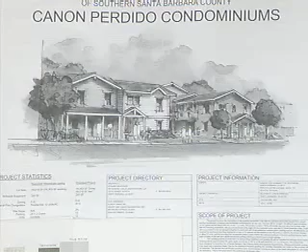Very good, Madam Chair and fellow board members. We're here, I think this is our 5th time on this project, Habitat for Humanity on 822 East Canon Perdido. It's 12 new low-income homes, and we're excited about the pace we've been moving, and the team's been working really hard.

Initially this project was to show that we can do green for low income. So we've got a lot of engineering that's happened and some value engineering over the last couple of months, and the project's targeting about 60% better than Title 24 currently. We're excited as we'll be wrapping that up in the next couple of weeks and getting into the building department. We want to thank the board for all the input along the way to help refine the project, and you'll see some of that based on the comments from last week.

So with that, we've got in front of you a mostly complete set. I left out some of the engineering that wasn't relevant to some of the ABR concerns. We've got a detail book, 11 by 17, with the cover, and then some individual building by building materials boards. And our color board, we have just one color board for all of the different buildings here, and they're tagged in the sets. So those are the pieces that you have in front of you.

Since we were last here, just want to generally go over some of the things before I get into the list, and we can look at some of those items that changed in more detail. We've got the full detail book now for your review, picking up a lot of the comments and coordinating those elements. The major thing we've done is we've redesigned Unit 12, which is on the Canon Perdido front.

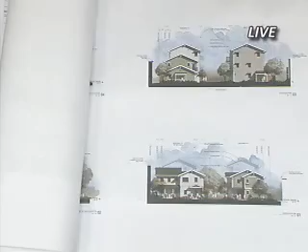We've also taken a look at some of the banding on sheet 202, which is one of the other comments. Some of the banding related primarily to Unit 2 here on this form. We've eliminated the banding on this, Unit 5 here, and Units 3 and 4 with their green color.

It kind of grounds it as it's more horizontal. By removing it, with a stronger vertical, it helped ground the building. I see a little typo here on the previous sheet where the ghost of our banding remained, but it is indeed intended to go away.

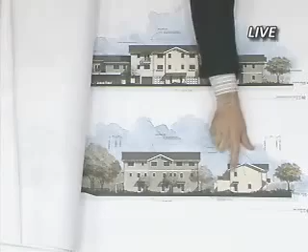Other things we looked at were alignment at the corners of the gutters and downspouts with some of the trim elements as well as the corbels. So throughout, we've beefed up some of the corbel elements and aligned them with some of the trims on the corners, where there's trim and sometimes without, as in Unit 2 here. We can take a look at that more closely, starting from Unit 202.

Here on Unit 12, with a bit of a redesign of the facade, which I'll come back to, we've got some stronger corner trims aligned with the corbels. We've removed the trims on Unit 2, so they are more independent.

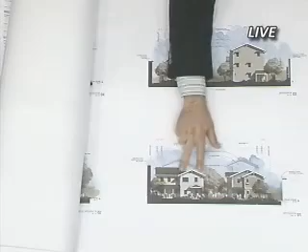Also on elevation 2, you can see on our third story unit here, Unit 3, that corner, which we felt was really important to keep as stucco, because when we looked at it in perspective, turning the corner without that was getting too monolithic. So we wanted those vertical breakups, and it carries through to the rear yards and also to the driveway, helping break up this 3-story building much better.

So you'll see that general realignment with the trims and the corbels throughout.

Additionally, the entry covers, primarily in the driveway on A202 and A203. Here on the white elevation, this is Unit 8, we took a closer look at the detailing of this canopy. We added some corbels to it, moved it up slightly, and increased the size of some of the members. You'll see the changes more pronounced on Units 3 and 4 of Building B on A203.

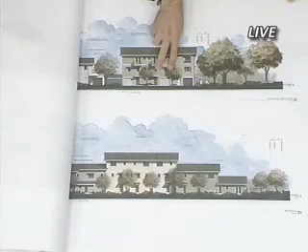Some of the other detailing which got refined is the window shading as well. We looked at the alignment of those with the heads, upsized the corbels slightly, and extended them out horizontally so they gave us a little bit of coverage. This is something we can see in the blown up elevations in the 400 series and also in the details.

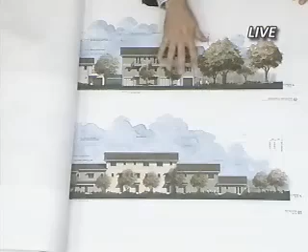The other item we were asked to take a closer look at was the windows themselves. We've gone ahead and added the sill piece back in and the sill apron, and left that trim detail consistent at all elevations, all window openings, whether siding or stucco. That remained consistent throughout. We didn't see the need to do something more different at those locations. At the other material locations, we thought this was working pretty well here.

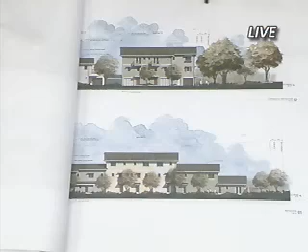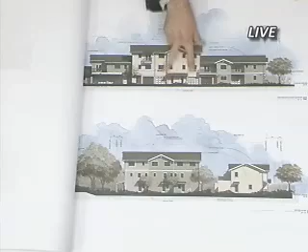Next item was that where two materials were used on the same building, a change of color should occur. We really just ended up at one location where this remained, which is on sheet A202, Unit 11. So this is we have a darker gray stucco over a lighter gray with the siding up above. At all other unit locations, the material is consistent from the ground floor all the way up to the roof. So this comment now just applies to Unit 11.

Number 4, there was no support for plaster horizontal bands. All the banding, as you'll see in the detail, is wood or a fiber cement type resembling wood, so that's what we have in the detail books.

Study the layout of detectable pavers and alignments with adjacent conditions. We'll come back to this with the hardscape and landscape review.

Number 6, study of wood trim around the windows is encouraged. Consider the details for consistency. I've covered that, and you can see that in the detail book as well.

Number 8 we've covered. Number 9 gets into options for introducing landscaping at rear fencing and preliminary landscape plans. So before I get to that, well, I think I've covered it generally, so I'll leave it for the board's questions on some of the details and larger views in the 400 series if you want to look at that more closely. So with that, I'll leave it to Courtney to take us through some of the landscape.

But let me touch on, again, the materials for the detectable warning, going back to comment number 5.

And so we've taken another look at this, and it's something that we're not entirely thrilled about either, with the requirement of the detectable warnings for the accessible path of travel. Here on L1, we're taking a look at it. We took another look at the code language, and the code is really constrained. It says the detectable warnings alongside the vehicular way must be 3 feet, or 36 inches. The building department has required us to turn those in just before the garages and after the garages, or groups of garages.

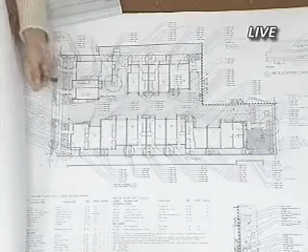Through the alley we have mostly succulents, the yellow Brugmansia and Agonis flexuosa - the dark purple one, I forget the name. So what we're going for is just a lot of color, low maintenance, low water, but something that's really going to pop and go well with the architecture.

So the other main comment since the last meeting was regarding this corner here and the slope. What we did is include a Brugmansia here to kind of catch your eye with the yellow flower color. We also have some Phormium, the dark bronzy burgundy one, and vines along this fence - the vines are Hardenbergia, which is like a light purple color.

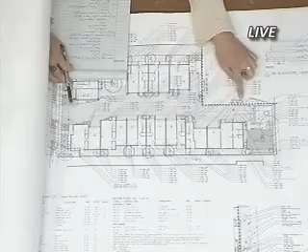And then we have a blow up of this whole slope area here on the bottom corner of the plan. So what's happening is we're going to be filling up to the dash line, and anything below that is being removed that's existing.

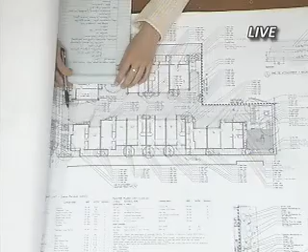We're still proposing a 42-inch high wrought iron fence along this whole corner. On the lower part, we have Lonicera vines with the yellow flower. So we're grouping some more showy stuff on the corner so you're not looking at an ugly slope, and just maintenance-friendly plant material everywhere else.

I think that's pretty much it. We haven't made any other changes to the plans. The pavers and the layout have stayed the same. We now have irrigation included in the set.

And I have a couple of the pavers that we have on the plans for you. So for now, this is what we were thinking, just a typical Ackerstone antique cobble, which we use very often on our projects. The color mix is kind of a brown, dark brown, and tan color.

All right, that's it. Is that it? Yeah.

Do we have anybody in the audience that would like to speak on this project? No? All right, questions from the board? Chris, do you have any questions? Gary?

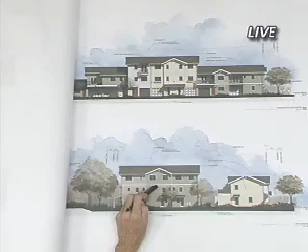This even—though it wasn't supported in the last meeting. Well, the banding, it's not a plaster band. That was what we understood wasn't supported, it was plaster trim pieces. But it's also just a flat band, it's not like wood.

It's a wood flat horizontal 2x8 piece of wood, is that correct? As opposed to the other ones, which have details to them, right?

There's a couple of different bands. Most of them are flat in the rear units. On unit 2, there's a more decorative band because it's at the street and it has some refinement detail, which also matches the other white building, or unit here, unit 8 as well. It's got a little more refinement in the trim, and that shows up.

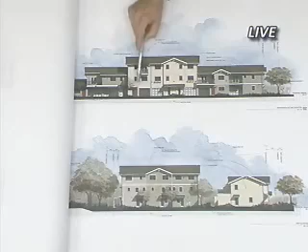Why don't you show us those details? Sure. Are they in this package? Yeah. I think it's here. 2122.

Yeah, my question would be on the banding, is that you have, I think, 3 or 4 different details on that, and where those different details occur.

Very good. So 2121 and 2122 are our trims there. They're not twins, but trim. Twins, I thought I heard. See, 2123 and again, as well, and it's going to be 2120.

There's four. They're duplicated where there's siding or stucco. So 2122, 2120, is this one. Correct, 2122 is the green building. Where's 2121? 2121 is the two white buildings.

Here, because it's a little more trim, it's shiplap or Hardy, carries to the front unit here, unit 2. So where the same materials are being used, the color, we carried that same trim piece.

And then 2123, it's also wood. 2123 is wood with the siding above and the stucco below. That's unit 11.

Okay, but again, the more simple band. But, and this is still Gary's question, so I'm just piggybacking onto here, this is that 2122 detail, but this is not the same detail. And this is wood and wood with the trim in between, and so is this, but you have different details.

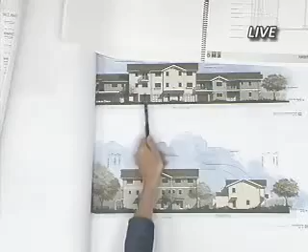Yeah, so with the siding here. Okay, yes, so there is one that doesn't show the same finished siding below. So 2123 is similar on the wood band. So it's really just the siding moving down through.

And so what we did is, again, we're kind of grouping the trims with the colors of the buildings. So the green stucco and the green siding is getting the more plain band, and the more decorative is the white building, or white unit 2 and unit 8 as well.

Those are the only two with the more decorative trim. All the other bands are the more simple wood trim.

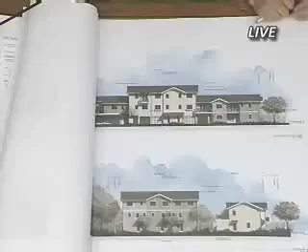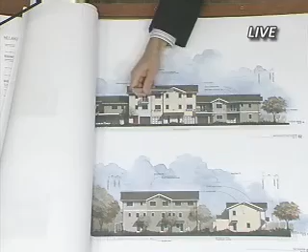We asked you about increasing the size of the corbels or brackets. What did you increase that size from, and did you? We did, and you'll see it in the detail book. The corbels were 4x8 material before, and now I believe they're 6x8s, though I didn't recall that exact number in my detail book.

I'll let you know which detail that is. Those are my only questions. Thanks, Gary. Paul? Keith?

On the horizontal siding where you removed the corner trim, what's going to be the detail there? This was a detail we saw around town that we liked, where we just miter the corners together. It's a little more elegant. This is fiber cement, right? Yes.

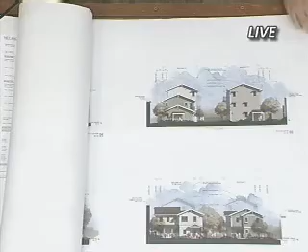Also, maybe you can point these out, I'm missing them, but it looks like your typical roofing details - the index seems to indicate some details, your typical kind of ridge, rakes, eaves, that kind of stuff. I'm not finding them.

The rake is 3004. Okay, I don't have a 3,000. Let's see.

The eave is 3002. How about the ridge? The ridge we haven't detailed - it's just going to be a standard asphalt ridge. We're not ventilating, it's a conditioned attic space.

Is the solar part of the initial? Yes, the solar is. The way we get to Title 24 is with solar thermal - it's an integrated hybrid system with solar thermal panels as well as PV. Do we have the details for the solar panel installation? At this point we don't - it's a standard module, but we can bring the details in certainly. Okay, thanks, no more questions.

Thanks, Keith. Stephanie?

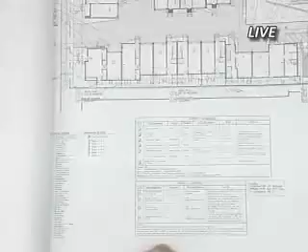Landscape questions - I'm trying to figure out, you have a lot of paving transitions, different situations, and I'm trying to figure out what this material is. Is it the curb? Which material, Stephanie? This here, this band around it - it's kind of shown as a curb, but is that what that is?

Actually no, it's intended to be a soldier course row of pavers - we didn't actually draft in each paver. It's intended to be flush. Where we have planters, instead of a traditional concrete curb, it'll be pavers. So is it more like this detail than this detail?

Yes, this is what it would be... well actually, would this, and where would this detail, where's this one? We may not have that - it just may be our standard.

I don't believe we have a concrete curb. Okay, oh well. No, I don't think that we do. So you're not using this detail anywhere? No. Okay, that was my question.

Is that it, Stephanie? Questions? Yeah, because I haven't had time to look at these. Okay, I had a couple.

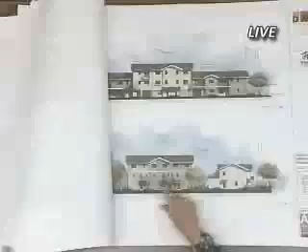There were the shed entries. Architectural is this way - which way? Then just go to the elevations. I think there were a couple of individual shed entries - there's one here, and these, and I think there's some on the back. There's one other - oh, here we go. On all these, do they have...

How are they supported? Because I saw the detail in the detail book, but it didn't seem to... Can you show me that detail?

Following the references - just the detail on the... it's probably in your detail book. I was thinking that, but here it is - it's 2902.

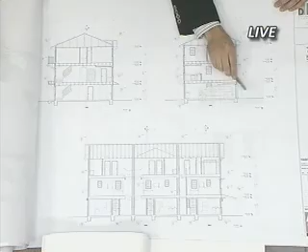It's just coming out, there's no corbel or anything - it's just drywall, very simple soffit. These are at the rear - they're rear covers at the rear yards, and so we wanted to minimize that detail.

So let me go back to the elevations over here - so these are all the rear. Sorry, keep going back.

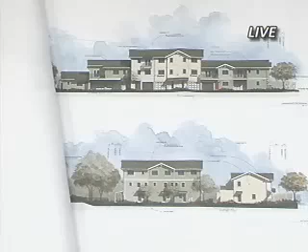Then I had a question. It was about the detectable warnings. I thought that the detectable warning was supposed to alert you to a hazard and not be the entire, not be the hazard, because you can't walk on these things.

And where's that hardscape plan? It's on L1. You were the one that did all the research. It was my understanding that you needed detectable warnings when you were entering a hazard, such as traffic, but that it wasn't supposed to be the entire walking surface. But I could be wrong. I'm just asking you.

The Our Lady Guadalupe Church actually has the same flush condition, and you can see the installation all the way around the sidewalk area where the detectable warnings were installed. So the requirement in the code is that when it's adjacent to a vehicular way and you don't have a curb or some other method, bollards or et cetera, to separate those, then you have to put the detectable warnings along the entire way of that adjacency. The entire 36 inches. Yes.

Okay, and the only reason I'm asking is because I just recently had a project, and it was very similar. It was a pathway running along an alley, and it was very specific. The building department was very specific that the detectable warnings were not supposed to be on the entire pathway. Was it flush, the paving?

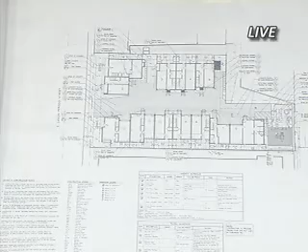Now, we did have a discussion with transportation about whether we could just do a rolled 2-inch curb along this edge. That was something we proposed, and transportation wasn't willing to go there at the time. So that's one of the arguments that we can go back with, because the building department seemed to be open to that as an approach and eliminate the detectable warnings.

But the other thing that's occurred is in March, the ADA standards were updated, and detectable warnings are no longer required, except at transit stops and also intersections. So, but the California Building Code hasn't caught up quite yet. So we're at this place where it's not ideal. We think we have a good argument, and that's why we want to come back and, again, through the plan check process, check with the building department and transportation and see if they'd be open to something besides it. It's our primary goal to come up with a solution that does away with it.

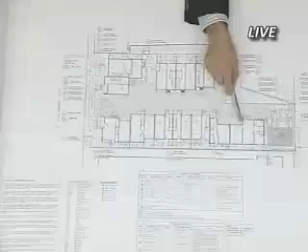And this is all because you couldn't have put the ADA accessible unit in the front? It had to be in the back? That's not correct. Because we have a common area here, where the accessible units ended up didn't really matter. You have to have, if you have a common area, an accessible path all the way from the right-of-way. So it was kind of a double whammy.

All right, this is a question about the landscaping. Where's that planting plan? L4. Which one? L4. I see a honeysuckle vine on one of the gabled entryways, which one again?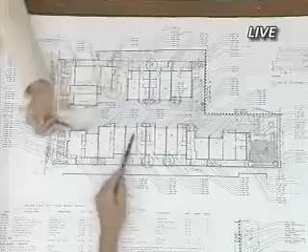There's one on every entryway. I didn't see one on every one. I just wanted to make sure that we had vines growing up on every one. Yes, we have one. They're a little difficult to see. Where are they called out? I'm not seeing them called out.

Didn't have a lot of time to read the landscape plan, so perfect.

Okay, thanks. Comments? Any more questions, Stephanie? No. Do you want to? Are you ready to make comments? No. Keith? Sure.

I think you really need to rethink the corner trim on the horizontal siding, especially with the fiber cement. So I think you need to rethink that.

We need to see the solar panel detailing, how those are installed. Also, I'm not getting the feeling that the detailing's there quite yet. There's a lot of dimensioning that's yet to be shown on a lot of the banding, for example, or things you're calling out as custom trims, and a lot of vertical dimensions like on some of the posts and railings and that.

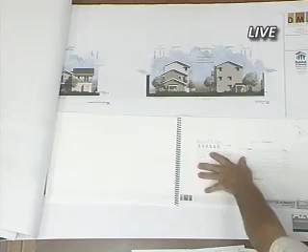There was another detail that I was looking at. This detail right here, where you have the 4x4s and a 2x4 on the flat brace that comes up on this - I think this is kind of an unnatural brace, and I think some detailing should be worked out on that. And I believe this is the same detail as this, or did you have that detail in the book?

No, that's not the mailboxes, is it? We do have that detail. Okay.

Well, anyways, I'm with Keith that we do need some more details, and I'm glad Keith brought up the solar too, because we've had some issues about the height of how high the solar sits on top of the roof, and that's why he was asking for that detail. So just some minor details that we should probably get.

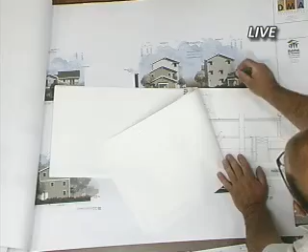Even the window details, which I think are actually pretty darn good, given the number of details that you have on this building, which you don't have a lot - they're pretty simple buildings. I think some of the fenestration details should, for instance, the header should be just a little bit more proud than the stiles or something like that. You've got 2x4s as stiles and then a 2x6 as the header, which are pretty common denomination timbers, and it's not really supposed to be a timber framed window fenestration.

It's supposed to have some sort of detail. So given that you're looking at a Craftsman style, you should have that on the windows. The header should be proud to the stiles or something like that, to give it some sort of dimensional change, to make it look like it's not a timber framed window fenestration.

One more over. Yeah, and you use the same details on the plaster as you did for the... this is still a door detail. Door. There we are.

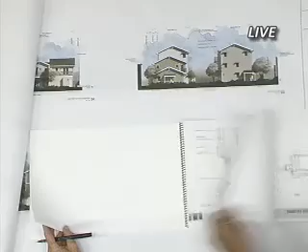So on the window, on the plaster details, they come out real nice because of the dimension of the plaster, and you're using the 2x4. But then when we use the Hardie siding, they don't come out as nice because of the way the 2x6 sits out on the edge. So the dimension here - you can see this absorbs some of that dimension and gives you the proudness, where this doesn't absorb that dimension. So just your choice of materialities, maybe you should look into getting different thicknesses.

Just my opinion. Thanks, Gary. Paul?

Oh, you didn't want to make any comments at all? I was kind of coming back to you. Okay, Chris?

Thank you, Madam Chair. I don't have much to add. The landscape seems to be all in order, aside from the detectable paving debacle. It doesn't make a lot of sense to me, so hopefully we can come to a resolution and cut down on that somehow, because somebody's not going to want to walk on that, and I can't imagine going that length on a wheelchair either. It'd be a bumpy ride, so it'd be a disaster. Yeah, that's pretty much it.

Stephanie? Yeah, I guess I'm concurring with a lot of comments that have been made about the window detailing. I appreciate you guys adding back in the apron sills. Turn your mic on.

But the one sill detail that I see here doesn't have any dimensions on the sill, and I think the members could be a little heavier. Also, an elevation detail of the trim around the windows, showing if everything's flush, or is the header coming out a little bit farther than the jamb casing or trim, and things like that. I'm a little concerned with your calling for gypsum on the underside of your soffits.

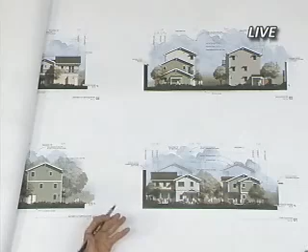And that's where the detailing is kind of muddy for me, like how everything works, because it's a lot more difficult to make wood trim work with stucco and make it look good. And so I think that's where I'm struggling. I'm looking at even this elevation here, and the appearance of that in wood, horizontal wood siding, as opposed to stucco with a horizontal band, to me just changes everything. And it makes or breaks this project for me, because I can visualize a 3-story building with horizontal wood siding because of the nature of the horizontal wood siding being so traditional.

And then going to stucco, I think that makes your job a lot more difficult. It's not as simple as just removing the wood siding and changing it to stucco, because the whole building style changes. I don't know if anybody else feels the same way. It's just that's where I think that if you feel like we're giving you a hard time, I think that's where it's coming from. And I know you spend a lot of time value engineering and you're trying to make it work. And in some ways, it's ending up costing a lot more money—it might end up costing way more money to do the stucco because of the detailing that you're going to have to do for it. I'm not seeing it working yet.

I still don't. I've made this comment last time that I think that this elevation on the east side of the property is much more successful than the west. I'm still struggling with this 2-story and this band, and the fact that this whole side of this west structure is kind of not very street friendly.

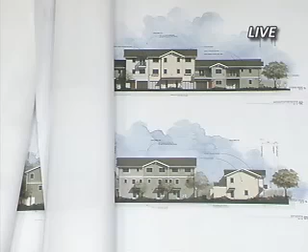Another one of my comments last time was to look at different ways other than banding to break up the 3-story massing. So you've got this 3-story building, and it's made it a lot more difficult for you to make the mass, bulk, and scale work, because you're trying to use just standard windows, and you're not punching windows out and putting a lot of three-dimensionality on the elevations. So that's where I see it not working yet.

I agree with all the other comments on some of the choices of sizes and some of the sizes not showing, and then how you've detailed the underneath side of awnings and overhangs, or how you've not even detailed it. Well, here you've got tongue and groove. That's good.

I agree. I think that's where the project needs to be developed a little bit more before we can give it final approval. I have a really big problem with the detectable warnings, so I think that also has to really be resolved before we give this final approval. So that's about it for me.

I want to commend Dawn for saying what she said, because it's what's in my heart. I don't want to say anything bad about the project, because I believe in the concept, but it's looking like the project has lost a lot of its cute architectural charm and character. When you say that you're now 60% better than Title 24 as something positive, you lost some of the architecture during the value engineering process. That's the role of this board, is to make sure that the building belongs in our community. So thank you, Dawn, for saying those things.

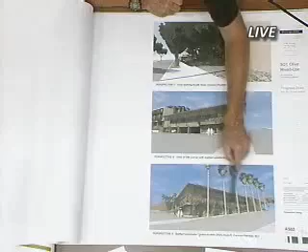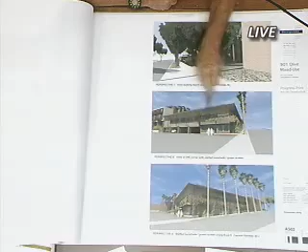I'm going to go to the bigger views. Here we go. So what we've done here shows a little bit on this perspective, but shows better on the backside - we've basically replaced this perforated corrugated metal with a horizontal trellage that will be in more or less the same place as it was before, but it's horizontal slats. And then we're going to be training trumpet vine up onto that, and some of it will actually trail up onto this upper portion. So the team had kind of considered some way of getting more of a green screen, which had popped up in different conversations here.

However, the traditional green screen that we're familiar with, at least by that name, is kind of a grid of metal wire or whatever. And I don't think that would have made any real traction here in terms of being less techie looking until the 3 or 4 or 5 years, or however long it would take for it to completely fill in.

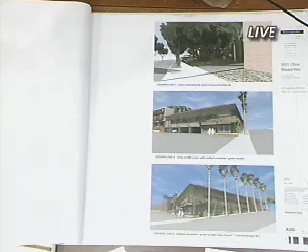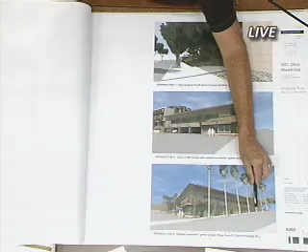So what we're really doing is emulating a wood trellis. It's actually in a 1.5 inch by 3 inch proportion. It's going to be tube steel, however, so that it'll last and be permanent. It'll be powder coated or Kynar coated in a brown wood color. We would do it in wood if it would last a long time, but that lighter proportion would go south eventually. So the idea is it has the proportion and emulates a wood screen.

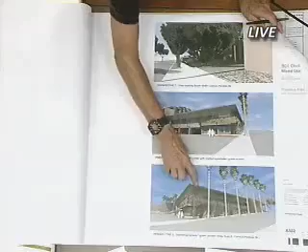And we're going to be planting it with vines. Then elsewhere on the project where we had corrugated metal, like up on the equipment screen, which you can see in some of these views back here, and on the building itself where we had the corrugated metal, we're replacing that with a horizontal cementitious siding.

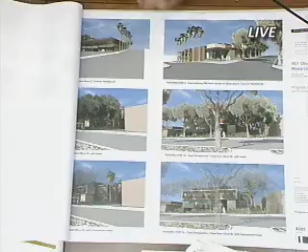It's not the bevel type siding where it's overlapped like shingles, but CertainTeed actually makes a version that's just like a shiplap with a reveal where the shiplap is, so it gets a horizontal reveal. It's still fairly strong horizontal, like T111 but horizontal - well, wider. They're about 8-inch boards, but individual boards, not T111, not at all. So that material would be used for the screen, and also where we had the horizontal corrugated metal on the building itself. We can look at those on the elevations, see it all the way around.

So here's the horizontal trellis. We're very happy with this. I think it really gives us a much softer edge along Cañon Perdido. Without stealing Phil's thunder, we're going to be working with the city to try to get some street trees on Cañon Perdido as well.

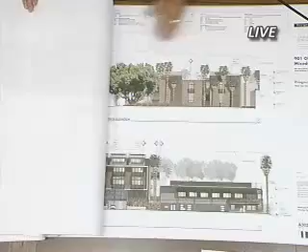So this would be the same horizontal siding as the equipment screen, same thing here coming up. We also eliminated a little bit of the board and batten. We had always had it shown as the board and batten within these cowls on the west side.

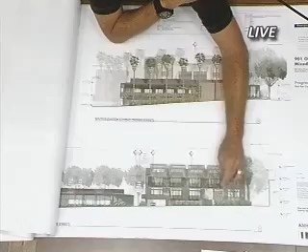On the Olive Street side, we had this reversed, with the board and batten down on the lower portion and the larger panelized, actually plaster, up on this upper floor. Well, we reversed that, so we've got plaster now on the lowest level, with the cowl floating above it, and the board and batten in between, which we think takes away a bit of that material on this elevation. It makes it a little bit softer.

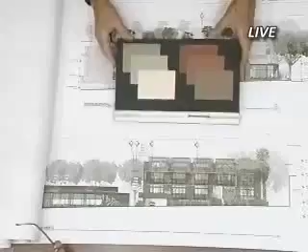This would be a painted plaster, dark, and we're going to be emulating the colors. We brought a color board here. We'll be defining those colors before final, but this is kind of the color palette we're talking about. We want to use this brick red to emulate a lot of the brick buildings that are in this block, but in a more subtle way. That would be the accent color, and the other lighter color of painted plaster would be the cowl. So it's a very warm palette.

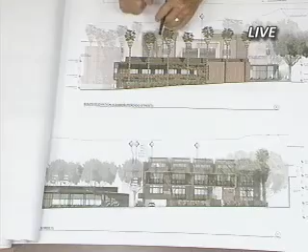We've also incorporated on this one little element here some natural Santa Barbara stone veneer. We actually always had that on the planters back here, and so we decided to pull a little bit of that materiality up to the front. That piece is where we have a stairway that goes down. It connects the garages, but it'll also more than likely have a lift to get from the half level from the upper floor garage up to the podium level inside of that.

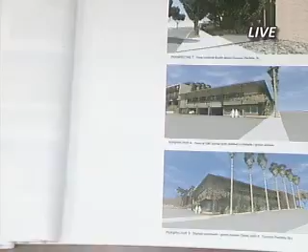There's a nice view of that too, and you really get to see that a little bit as you're looking down the sidewalk behind the tree there.

As far as the height, we've done some more work on bringing the building down, and we're going to show you a comparative.

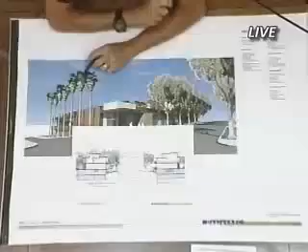This is a comparison section, and what we did is we just took the section looking north and south and put them nose to nose, so you can really read all of the numbers as they go down. The red numbers represent the total reduction from the first time you saw it to where we are now. It's gone down another 6 inches.

So the plate height up here from the very beginning has gone down 2 feet. You can read the numbers as well as I can. The front cowl, which is probably the most obvious, has gone down 3 feet 6 inches. That's this piece, which is what I pointed out that's what you really read.

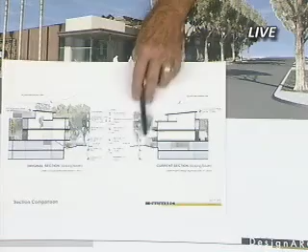The apparent height of the building, apparent height from the sidewalk, and we went down another 6 inches on this floor level since the last time. So it's actually been down a foot from 2 times ago, and we've lowered this level of the garage 6 inches. That's what I mentioned to you last time.

We were able to, by moving around the balcony, lower that in order to still maintain our 8 foot 2 inch clearance for the handicap vans on that level. We have to have handicap parking on both levels, so we can't lower that anymore. So that represents the numbers of what we've reduced.

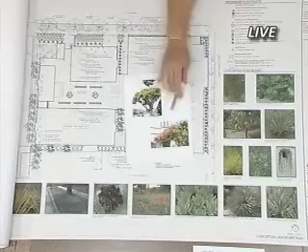And those would be in tree grates that would be 4 by 7, which would still allow ADA access between the trunk of the tree and the edge of the sidewalk. And then the last movement we made was just the Distictis, as Mark mentioned, on the trellage that is along Cañon Perdido.

There was an elevation, yeah, it appeared there was like a low, what's this kind of horizontal element that's here? That's the same material as this, and that is ventilation into the garage. Okay, so that's the facade of the garage. That used to be perforated corrugated, but now it's in the same kind of slat. Okay, and the proposed color of the plaster on all of them, it's that medium color. Okay, no more questions. Matches the color of the building body that we'd be doing. Excuse me, this is a darker one, but was the intent that this color matches the building body? It's kind of hard to tell with the shading of the trees, I think.

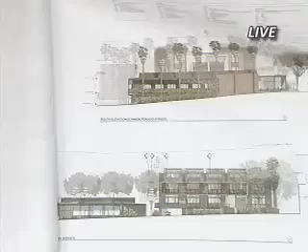This right now is a slumpstone brick wall, and you're covering it with plaster? Right. And what was the reason for covering it with plaster? We just wanted to get it a little less textured. We thought it was a little bit too coarse for the look of the building, the model, the undulation.

So the slumpstoneness? Slumpstone. Question having to do with the palm trees. The palm trees shown that you're proposing, are they from the site, or could they be from somewhere else? They could very well be from the site if we get approval for a palm tree. It may not necessarily be that palm tree because that's a pretty tall palm tree.

So do you have extra palm trees that you're looking for a home for? Yes, we do. Because you are proposing to have some along the back side. So you didn't relocate any, you're not having any less anywhere else on the property.

Well, we moved some into here. All of these that are located here would go in through here and back in through here. They would be moved from this location back to there. And then some extras could go along Canon Perdido.

And you said the designated street tree is a canopy tree. Was there any more specifics besides just... I'm sorry, I didn't get into the specifics. It's this tree here, the Melaleuca linariifolia. As you can see, it is quite a big tree, a big canopy tree. 8-foot sidewalk is what we have there.

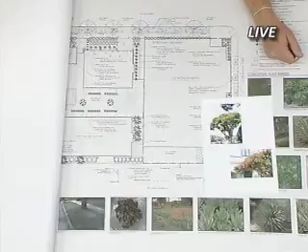Does that not fit in an 8-foot wide sidewalk or the tree well? It gets pretty tight in there. So what kind of canopy tree would the city rather see in that zone? I would have to confer with the urban forest superintendent and the street tree advisory committee. Oftentimes, the street tree advisory committee will designate or change designation or have dual designation.

Okay, and then last question, I was going to look at the site photographs. The roof cantilevers or overhangs here at this point? Yeah, and that's what that lattice work was going to be attached to. Did it have vertical columns that went all the way down?

And so that stays in place, and then the screen goes on those two levels. When it turns this direction, were there columns that came down? We're doing little L-shaped upside down brackets so we can carry that. The roof overhang does go along here, the same roof overhang that's here, but there's just no brackets, so we're hanging down those brackets and making them L-shaped so we can continue that sun shading along the west.

And the purpose really for having two layers is just for the thermal protection of the solar sunshade. Primarily, yeah, you can see it here. Here's where they... Exactly, right. But the roof overhang exists currently.

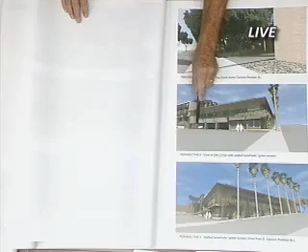Yes, the vertical columns on this side exist, and you're adding the brackets here. Right now these are very small columns as well, little tiny tube steel columns, and we're proposing to encase those into a board form concrete, into a blade, like a plane, so that it gives a little bit more mass to sit on, and those are the same that happen in the new piece as well. Okay, thank you, those are my questions.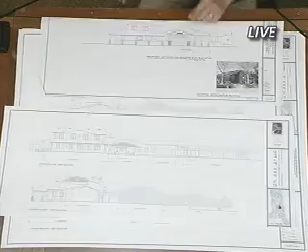And this was the original elevation that was approved with the design approval. And then this is what we showed last go around, which there was concerns with this area here, and also the well, and then no fenestration in this area here, and also the shaping of this elevator tower.

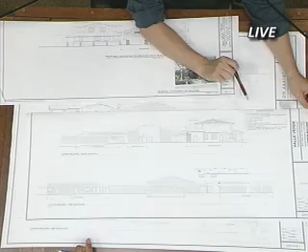And the elevator tower on this side, and also the fenestration here, and then also the shape of this window being out of scale with the rest of the facade. So those were the basic issues, and then there were some details as well.

Well, let's see what you have proposed. Okay, what you are proposing. Actually, keep that one handy in case we want to make reference. Sorry about that. So this is not as important. Yes, well, this is what we're proposing today.

So if we have scaled this back, let's just go and do this. We've scaled this back more into proportions as requested, and studied the detailing, brought back the flared columns, and beefed things up to give it a more residential feel.

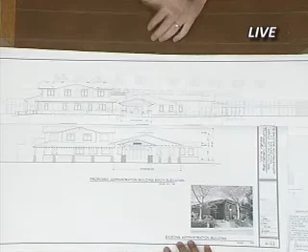And then we studied the equipment well, and one of the recommendations was to try to make it feel like it was a balcony and hide it that way. So that's what we've done, is we've created a balcony detail up here. I think that's all for this elevation.

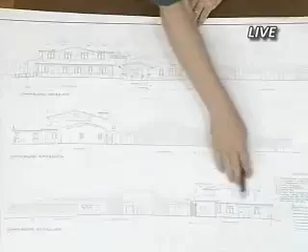And then moving down the line, we studied - this was a gable before, and now it's a hip, and we have a nice little detail going around it. We have put in these new windows here in the bathrooms. We put in new windows here on this - there's a bed and breakfast above, basically a little hotel room, extended stay. And then there's the new elevator tower.

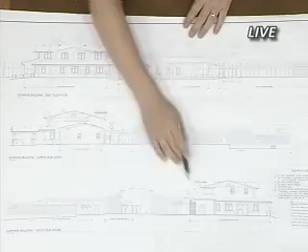Here is that unusual window that was very large, and we've brought it down to scale. We've also brought this all the way over to help create - this is on the south side, so it will help with the heat. And we've added more of a vertical feel with the vent, which was one of the requests.

One of the things that was requested is that we study working on this building here. I went back and talked to the corporation, and really this building is a whole other phase - they want to stucco the whole building and treat it appropriately, but they don't have the funding right now. This was very carefully thought out, what we were going to do and what we weren't. Adding any type of detailing here was never part of the program. So it's on their schedule, and they're slowly building up funds to do a whole remodel on this building, but it's not in the plan right now.

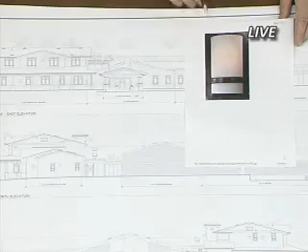And then the other request was to study the light - it's an ADA light. I've looked for more arts and crafts style lights that meet ADA, and I think they're all going to meet it, it's just that it slightly extends out too much. So we could have them custom made, or we could go with something like this. I'm still looking, because I'm not thrilled with this light, but I needed to bring something to get approved. There was one that was perfect and says it's ADA, but if you look at it, it's slightly over 4 inches. So this spec meets the 4-inch requirement.

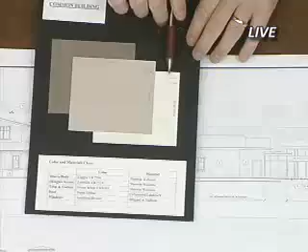And then our colors, just real soft - we've got the trim color, and then this is the stucco body color, and this is our accent color.

The accent color will happen along this belly band here, also on the columns and column bases. The cap is sandstone, and we looked at doing a different type of stone throughout the whole column and flaring it a little bit more.

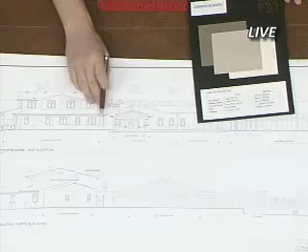That was one of the recommendations, but some of the concern was that if there was too much stone there that was too jagged on these corners, it would be a potential problem as far as nicking it, and there's a big issue with bleeding when you nick your skin in the retirement community. So that was a concern I hadn't thought of, that was brought up when we were working on these columns. This is going to be a well-traveled colonnade for the residents.

And then the other accent color would be right in this gable here, and also in this gable as well. So those are our colors. That's the existing roof color that we'll be blending into.

And to see if there were any other issues - I did look at the overhang, because I think we had 3 inches before between this and the column cap, and we brought it back to just 1.5 inches. So that was one of the details we studied. I think I hit everything.

On item 2 on that list, the span support and the supporting beams at the bus stop is too large. Originally we had - where was that? I think it was like 28 feet, and now we're down to less than what was approved before, so we shrunk it down even more.

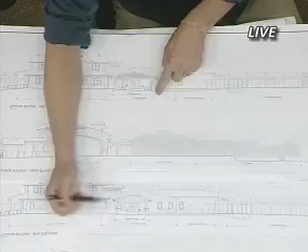One of the reasons was we were trying to make both sides of this accessible, a path of travel with seating, so we just kind of scaled things back and made it work and still accessible. We just don't have seating on both sides.

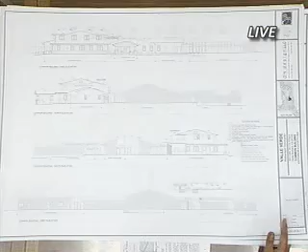You can see I was drawing them in here because the double windows didn't have them. It was just a... yeah, I actually think it looks more appropriate to have them the same on the top and the bottom. It follows the family.

So with that, is the board comfortable with the following comments? Or go into consent? Motion for final approval with the following comments: applicants encouraged to continue looking for alternative sconce fixtures for the lighting, and revise the plaster wainscot detail to bring the lower portion proud of the upper portion. That's detail 5 on sheet A9.1.

Is there someone who would like to second that motion? A second. Second. Any other comments? If not, final approval. All in favor? Aye. Opposed? Motion carries unanimously - oops, I don't think I saw this last time. Someone abstained, one abstention. With that, thank you very much, and I'll announce a 10-day appeal period. And I will close the meeting for June 11th. Good night.